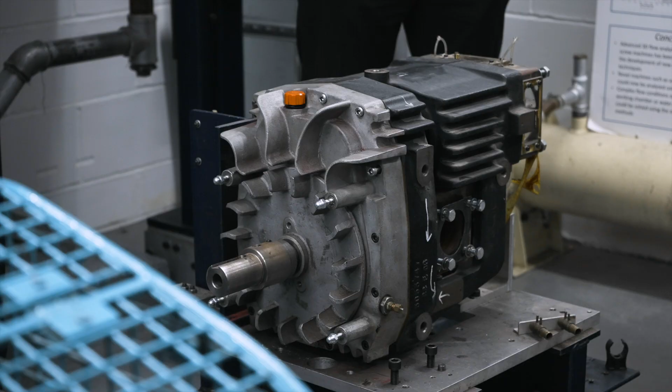meet the research team. The first phase of this project is dedicated to understanding the physics of the flow within clearance gaps of rotating positive displacement machines, improving efficiency and performance and the reliability of these machines. Phase 1 for me is all about setting the foundations for success, and I'm strongly encouraged by the progress we've made so far. We have set up state-of-the-art laboratories in order to understand this physics, to provide the data for validation of our high-fidelity computational fluid dynamics.

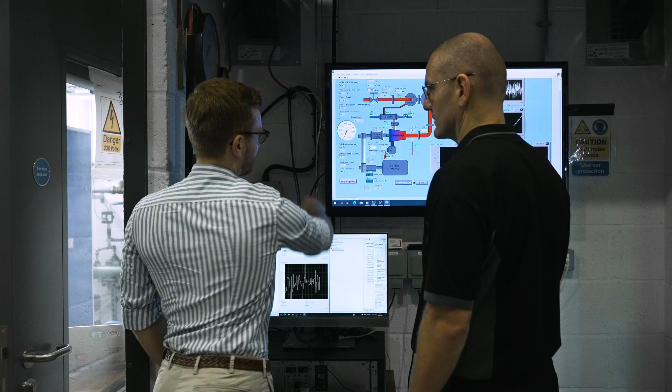Howden have worked closely with the team at City University to demonstrate the state-of-the-art in terms of measurement, modelling and experimental techniques. This groundwork will define the direction that the research will take over the next 4 years, so having Howden involved from the outset ensures that the project delivers outcomes which are of value to industry and make a real-world impact in reducing energy consumption. We've formed a great team dynamic with a clear vision, and they're already beginning to develop ideas to solve long-standing challenges in the areas of heat transfer and clearance management.

Work Package 1 focuses on the development of a Roots blower test rig to measure temperature and flow field in actual running condition of the machine. It involves the design of a data acquisition system for the measurement of machine operating conditions and optical measurement setup for velocity and temperature field measurement.

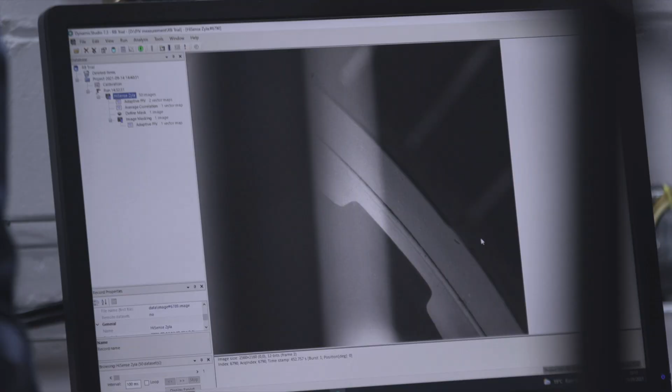As a part of Phase 1, an optical Roots blower test rig is prepared along with a new National Instruments-based data acquisition system. Infrared thermography and particle image velocimetry experimental test setups are designed. Necessary system components are purchased. At the end of Work Package 1, we have a fully functioning optical Roots blower test rig with 2 different experimental technologies, which are necessary to start Work Package 2.

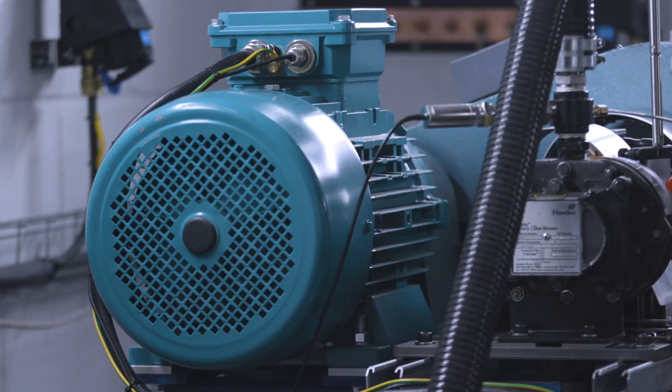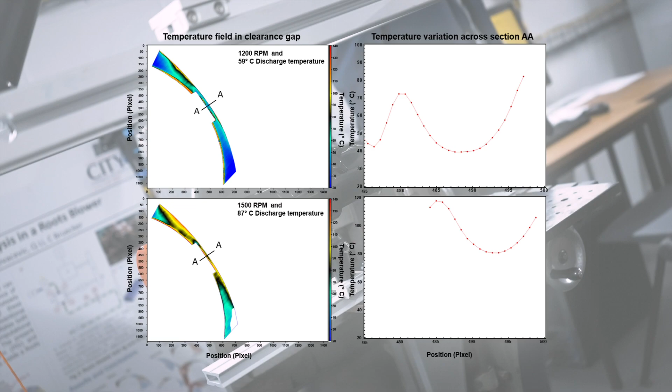The main objective of Work Package 2 is an experimental investigation of the leakage flow velocities and temperature in the clearance gap of the Roots blower. We have carried out infrared thermography tests and measured surface temperature of the lobe in machine running condition. Infrared thermography data were processed and analyzed. PIV experimental setup is also completed and commissioning of the PIV test setup is carried out. Obtained experimental results will be helpful to understand the flow physics of leakage flows. Also, this experimental data will be the benchmark case for the CFD validation.

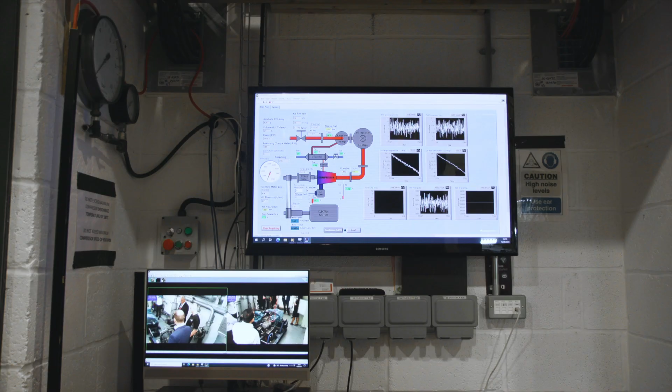Experimental research on leakage flows in PD machines is highly challenging, and it is essential to develop state-of-the-art numerical models that can provide data for better understanding of leakage flows alongside measurements. With this research need, the objectives of numerical investigation are to develop CHT models for twin screw compressors, validate them and use them for design improvements. In Phase 1 of the project, 3D CFD models that are currently in practice were extended to include heat transfer to and from the metal components of the compressor. This was accomplished using the customized numerical grid generator tool SCORG developed at City University of London.

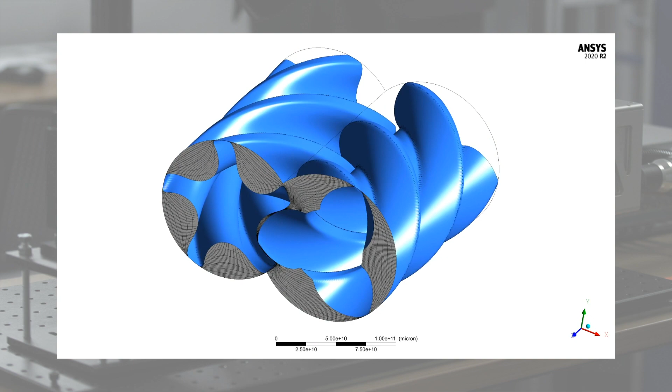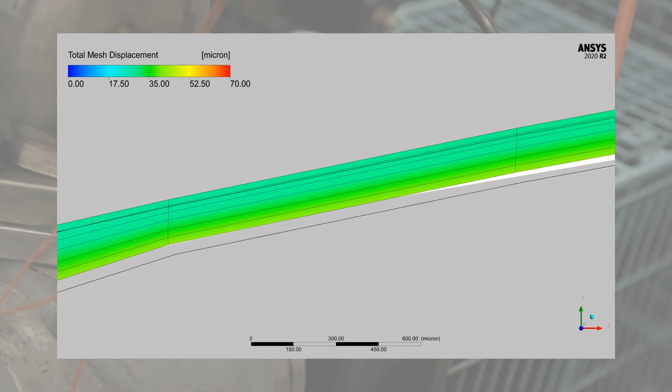Numerical issues such as heat transfer timescale disparity and computational boundary conditions surfaced and have been identified to be tackled as the research progresses. A novel methodology of bidirectional system coupling was studied in order to use it in the context of evaluating leakage gap size variation due to thermal deformation of the rotors and the housing during operation. These developments have now enabled us to get into the details of flow physics, study interaction of the metal and fluid during compression, and validate the models using measured data. Such validated numerical models thus give us a baseline condition, which can then be used to perform design changes and evaluate with reliability how these changes will influence leakage flows and the overall compressor performance and operation.

The objective of Work Package 5 is to establish a unique information platform using Internet of Things technology. We're doing this for a number of reasons. One of them is so we can store the data generated in a scalable, robust and secure location, but more importantly, once it's there, it means we can now connect the data to a number of tools that allows us to analyse it using state-of-the-art techniques.

During phase 1, we have managed to integrate IoT devices into the refurbished test rigs measurement system. This allows us to collect data remotely and carry out analysis in the cloud. In the bigger picture, it will provide us with a better understanding of clearance control, as well as view the future of the machine. Personally, I was involved in the recruitment process of the PhD students and also the postdoctorates.

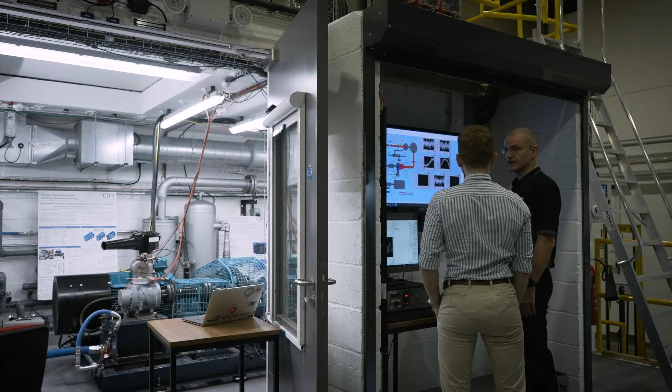Since the project got up and running properly, I've been heavily involved with Alexander Krupa on infrastructure architecture design of the connection and then the implementation, where we can now actually jump onto the City Edge device from the Howden facility in Renfrew. I've also been working with Thibaut Tam on instrument selection on clearance measurement, and it looks like we've narrowed down the selection to 2 different types for further assessment.

One short-term goal is, now we've connected, we need to start transmitting the test data for visualization. The longer-term goal is pointing the machine learning techniques and the original equipment design models to the data generated to provide intelligence on the performance and health of the machines.

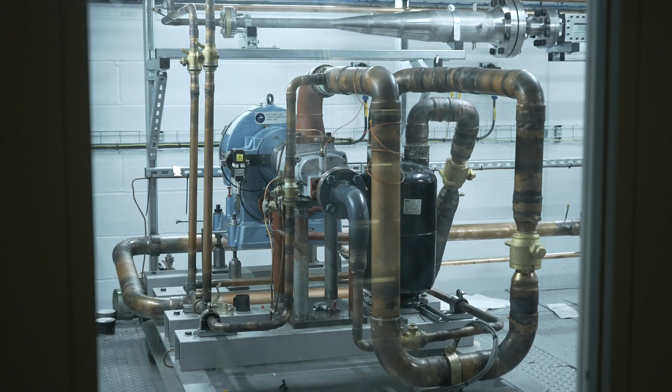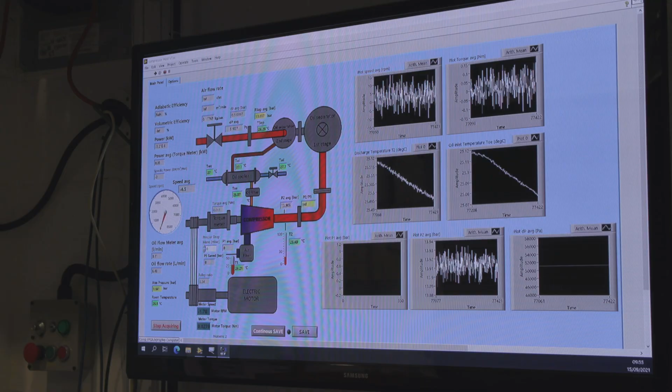The objective of Work Package 6 is to explore technologies and techniques on how to measure these operational clearances, to give us possibilities to basically control them later on and to change the operation of the machines. We were able to test 2 types of probes, eddy current probes and optical fiber probes.

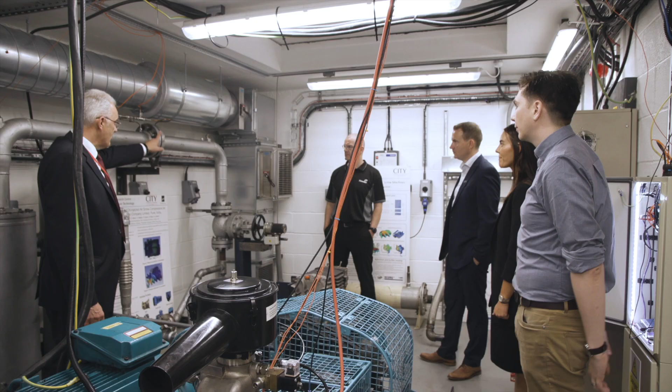With optical fiber probes, we will be able to measure multiple parameters, not just the clearance of the machine, but also temperature and pressure within the clearance gaps, which will give us really an insight into the physics of flow within the gap and will give us a lot of options to conceptualize techniques to implement that later on in a prototype machine.

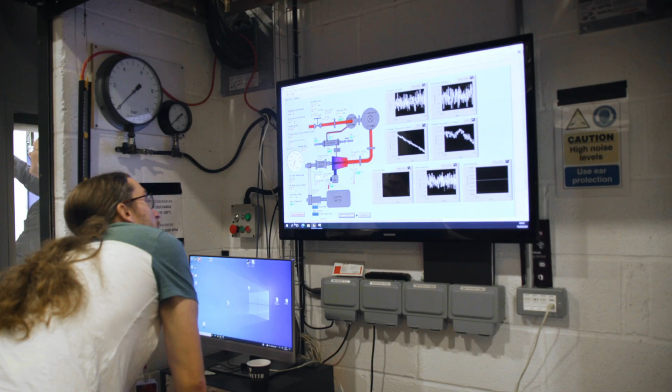Work Package 8 is dedicated to the design and implementation of a prototype of oil-free screw compressor, able to be modified to integrate new concepts developed in Work Package 7 and instrumentation studied and developed in Work Package 6. We have defined the specification and requirements of the prototype. We also selected the prototype that we will use, and the rig is ready to test the compressor. This leads to a fully functional and easily adaptive prototype of compressor, as well as an operational test rig to test the compressor in various conditions.

The second phase of the project will be key in turning initial ideas and concepts into more definitive packages of research, which we can then begin to model using the tools and methods at our disposal. We are looking forward to a huge amount of useful data coming from the experiments. This will combine with advanced modelling techniques to give us a detailed view of the factors that affect compressor performance and reliability.

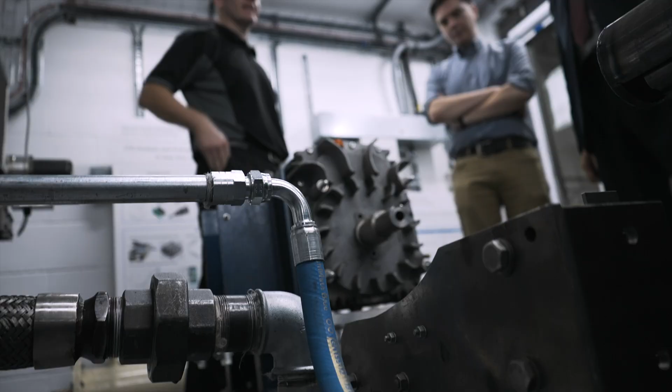The really exciting part will be the development of novel concepts to improve machine design based on this new knowledge. We have some potential innovation routes in mind already, but in phase 2 these will be assessed and developed into specific machine features.

This firstly enables Howden to reinforce its position as the leader in fluid handling equipment. The oil-free screw compressor is one of our key products for long-term growth and sustainability. We already have a great track record to build upon, and with this continual development of the technology and its applications, it represents a great opportunity for us to strengthen that.

Howden have an established oil-free screw compressor platform which has an extensive digital twin and CAD modelling supporting it. This allows us to rapidly evaluate new design concepts and roll them out quickly, making incremental changes to improve performance and reliability. The best part about this is that we do not need to wait until the research programme is complete. We're already implementing some of the key learnings into our product development efforts and seeing the commercial benefit come through.

In the longer run, the project will ensure that Howden are at the forefront during the growth of the oil-free compression market that we anticipate in the coming years as industry transitions to cleaner, higher efficiency compressor technologies. Ultimately, it will lead to a new generation of environmentally friendly, reliable and easy to maintain machines, which will help us with our race to net zero.